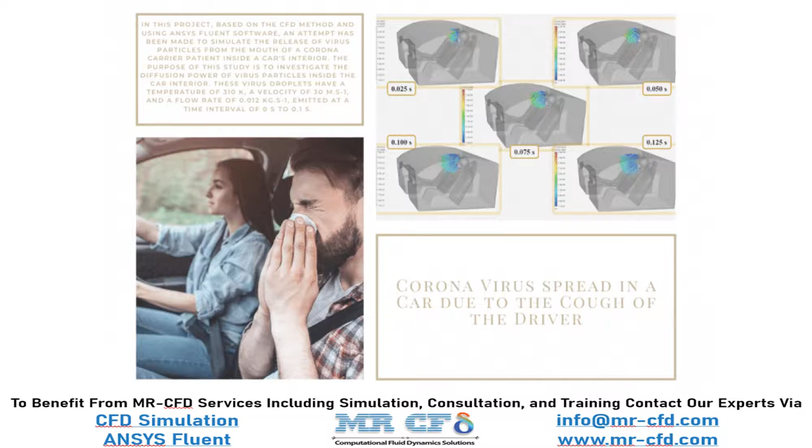In this project, we will simulate the coronavirus spread in a car due to the cough of the driver. The present model is designed in 3 dimensions using Design Modeler software. Also, the meshing of the present project is done using ANSYS meshing software and the mesh type is unstructured.

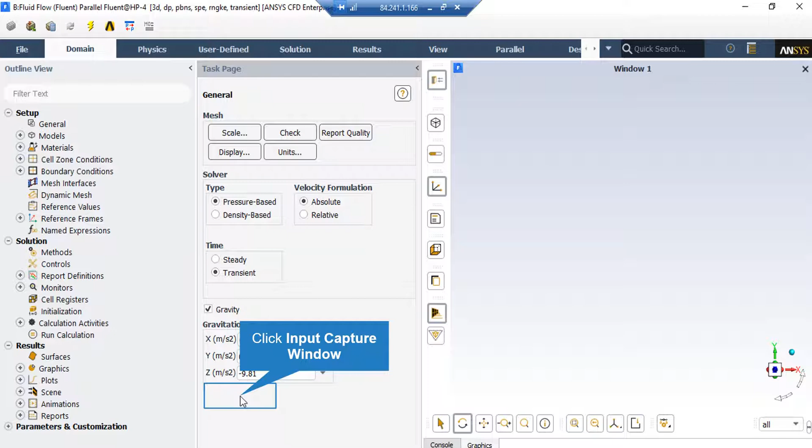In this window, under the injection type, select surface and then under the release from surface which appeared after selecting the surface as your injection type, select the mouth surface. Also under the particle type, select droplets since we are simulating the droplets of cough or sneeze. And under the material, you can see we have selected the water liquid.

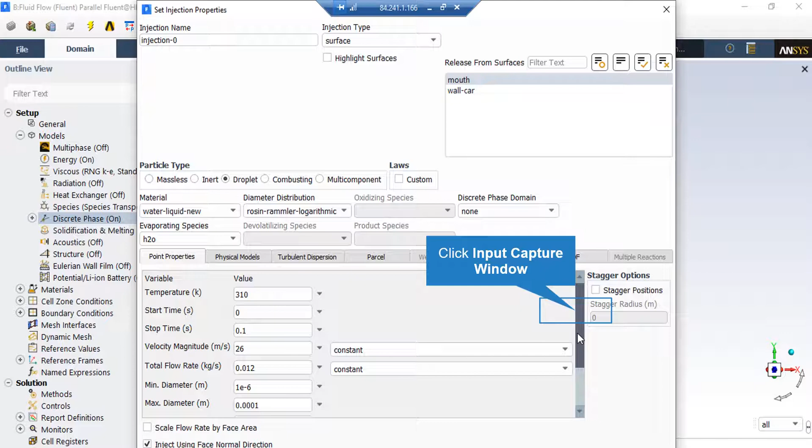Also, we have a distribution of diameter of our particles which is selected to be Rosin-Rammler logarithmic. And since we have evaporation, we have enabled the evaporating species as water vapor. Also under the point properties tab, you can see the properties related to these injections. Now if you can remember, we said something about how to add a new material so that material can be used in the species model section. To add a material, you can simply right click on fluid, go over new.

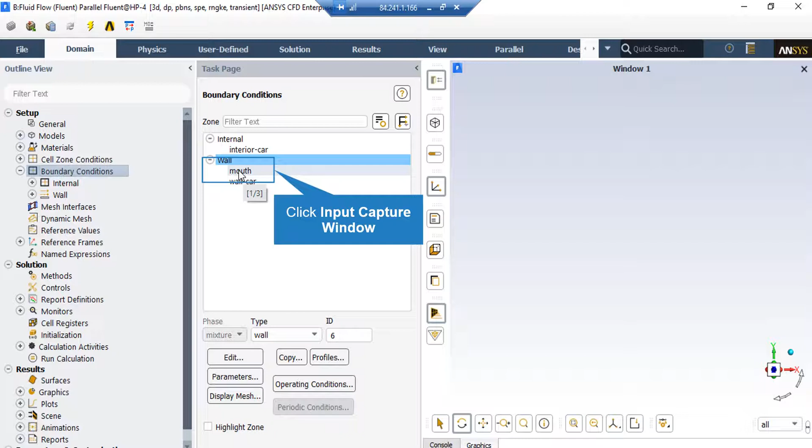Now if you double click on the boundary conditions button in the appeared part under the wall boundaries, click on mouth and then click on edit button so that you can change the settings related to this boundary. Now if you double click on the controls button in the appeared part under the solution controls, you can see different values for Courant number and under-relaxation factors. Now the Courant number is a factor showing how fast we are progressing in our simulation process, and for the problems with high nonlinearities we should decrease this Courant number.

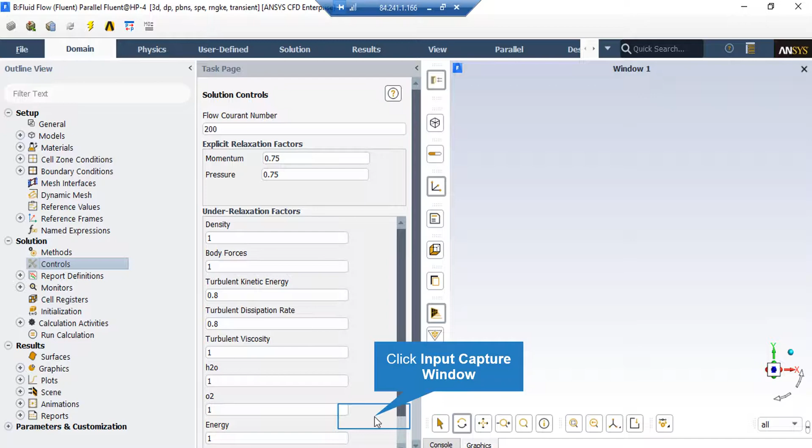Also the under-relaxation factors are factors that are used for different reasons. The main reason is that they are used to damp the fluctuation and errors in each of these parameters and they can have different values that are between 0 and 1. However, it is highly recommended that you do not change them since it may result in divergence.

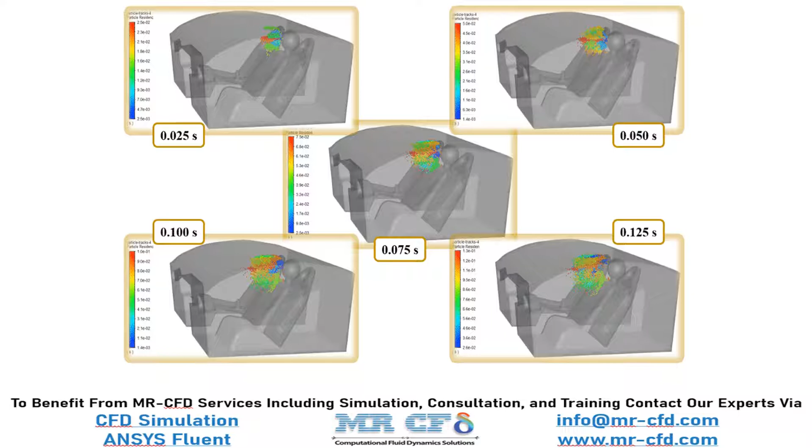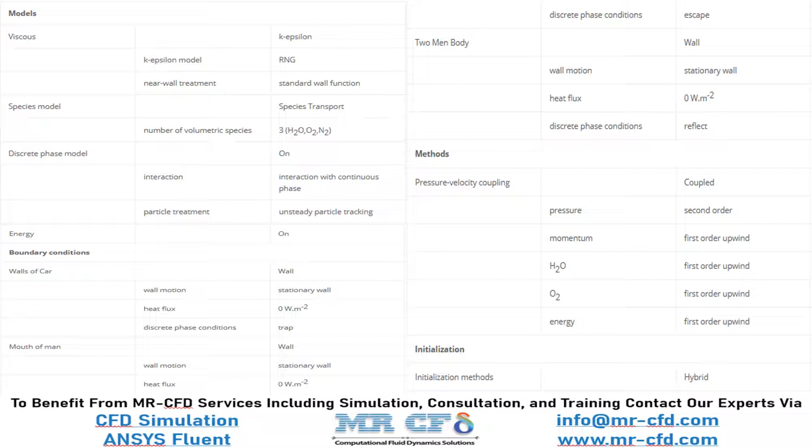Coronavirus is known as the biggest human challenge in the world today, and the high transmission rate of this disease is very problematic. Coughing or sneezing of a COVID-19 person without a mask can spread the coronavirus in that space. One of the important recommendations of doctors regarding preventing the transmission of disease between people is to maintain social distance between people in small closed spaces. The interior of a passenger car can transmit the virus to its occupants.

In this project, based on the CFD method and using ANSYS Fluent software, an attempt has been made to simulate the release of virus particles from the mouth of a corona carrier patient inside the interior of a car. The purpose of this study is to investigate the diffusion power of virus particles inside the car interior. For the present simulation, the discrete phase model is used, because this model allows us to study a mass of particles discretely or bit by bit in a continuous fluid space.

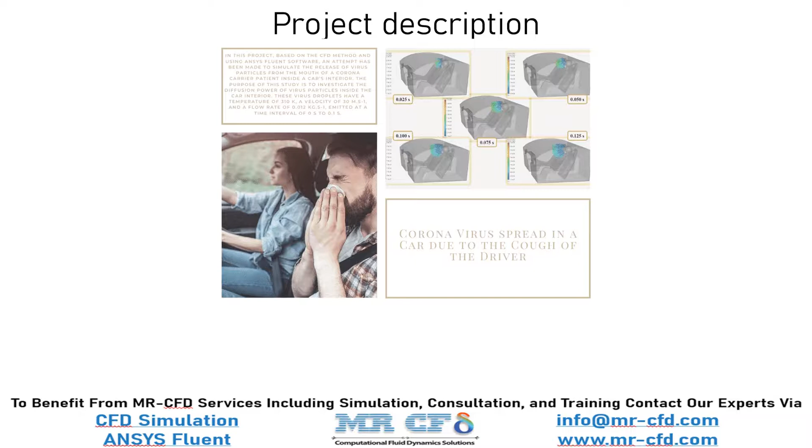Due to the choice of this model, the wet particles of the virus secreted from the patient's mouth are considered as a discrete phase, and the airflow inside the car is considered as a continuous phase. The physical models of discrete particles defined in this simulation include two-way turbulence coupling, meaning the two-way interaction between continuous and discrete phase by activating the interaction with continuous phase.

The present model is designed in 3 dimensions using Design Modeler software. The geometry of the model involves a car, but since the purpose of this work is to investigate the behavior of discrete virus particles inside the car, only the interior cabin space is defined as the computing area. A person is also designed as a car driver in the car seat, which is defined as the source of cough virus.

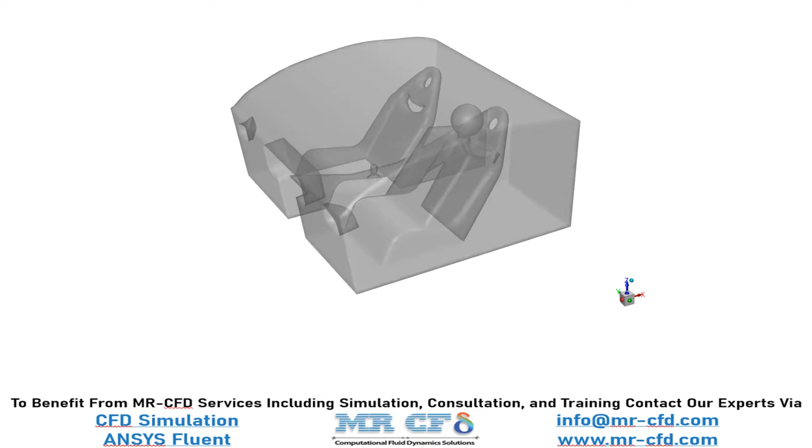Hence, the surface of the patient's mouth is differentiated by the mouth boundary condition because this surface is assumed as the reference level of discrete phase virus release in this model. Also, the meshing of the present project is done using ANSYS meshing software and the mesh type is unstructured, and the element number is equal to 290,403.